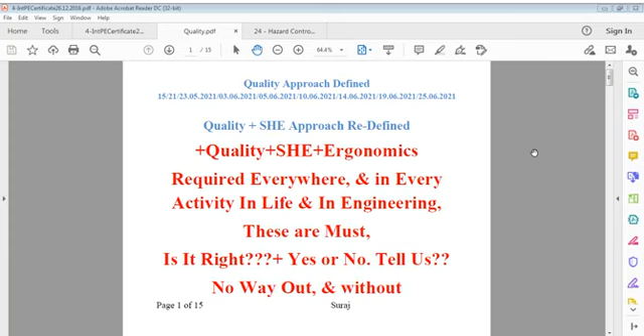I'm not going to repeat the whole file of quality here. I'm just saying quality is the leader of work. If the leader is defeated, the whole work is defeated. The whole input is defeated.

Therefore, it is a basic requirement of every professional, particularly engineering professionals, and of course particularly where quality is not dependent on mechanical performance, like civil engineering. I'm very much concerned that it's such a natural engineering, you can't imagine other worlds. Open-ended engineering, not closed-ended engineering, researchable engineering, super engineering - meaning civil engineering and construction engineering and design engineering are prime worlds of engineering.

Such engineering works digest everything, and is really...

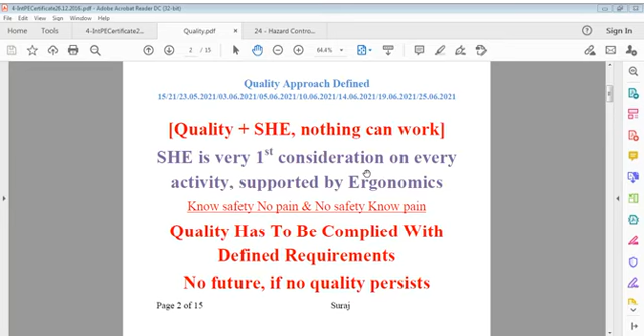And systems should be as such. Systems should be devised as such. Quality is to be achieved and must be achieved. And if you cannot achieve quality, your system shall lead you nowhere except to destruction or deterioration, and you won't be able to reinstate that.

Always quality has to be enriched, it has to be upgraded. Quality meaning is quite different here. Means whatever you have to decide and do work accordingly.

Engineering is quality education. Engineering is quality profession. If you don't deliver quality, you cannot say you engineered it. You engineered bad quality means bad engineering. Engineering good quality means good engineering.

Because engineering itself is work of mind. It's not simply physical work, it is mental work. Combination of mental work and physical work is called engineering. And if you don't apply mind, you can't get quality.

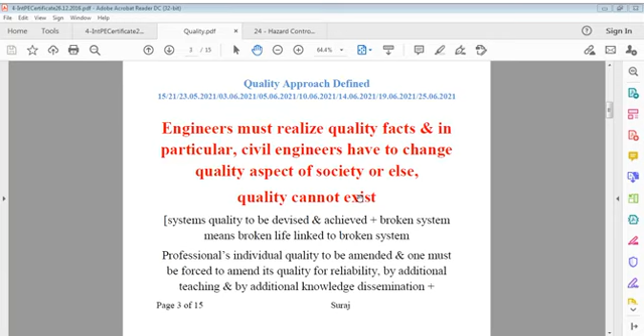Even you can say, if you don't respect nature, no problem. Respect yourself. Respect what you say, what you think, what you do for this world. That shall be enough, no need for something else. Because if you preserve your working with preserved material, you will get a lot.

If you do against nature, you do against yourself, because you too are a part of nature. You did not make yourself. You did not get birth because of your own efforts. You were brought to this world by someone else, whoever that is. That is the same power of nature.

And you are using natural materials while you work. While in work, you use natural materials, you use natural products, and you use natural human being. I am saying natural human being. Of course, human being is natural.

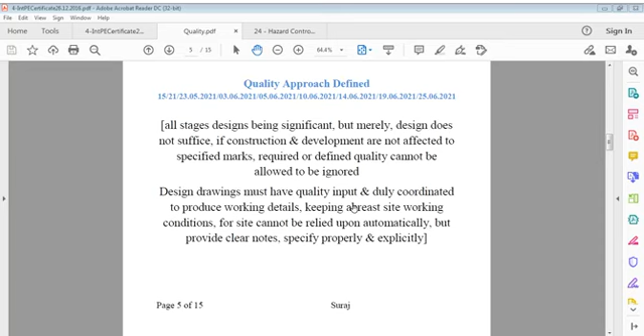We can say loss of work, or you can say destruction of material, wasting material is wasting nature, and no one has got any right to waste nature. Only nature has got that right. We don't have that right.

Therefore, we say that all activities, whatever we do, must be taken care of, but it does not happen. Somewhere it happens in some parts of the world, and in other parts it doesn't happen. But there are many reasons behind that.

Human is very weak and human is very strong. Both properties human has. Those who retain or remain in a monotonous state, there are various reasons behind that. Various reasons behind lethargy. That lethargy cannot be digested, but it happens.

Human beings are lethargic. We are human beings. We sometimes are lazy, and we sometimes are very active. It happens. Our attitude keeps changing, and we are not machines. We are natural product. We feel, we have sentiments, we have morals, we have low morals too. We depend on eating, we depend on food, and we have variations of energy, varying energy, fluctuating energies.

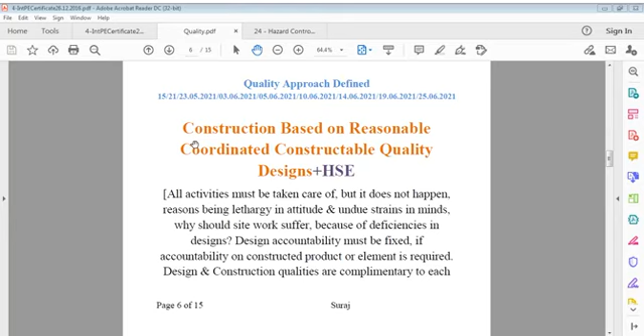So I am doing harm to my present. Certainly, when you use bad material, it will not give you enhanced life of the structure. It shall come down somewhere, it shall fail.

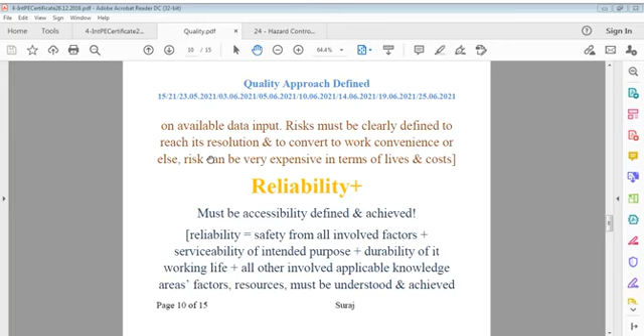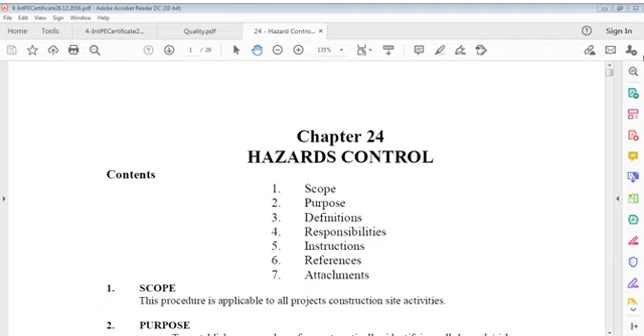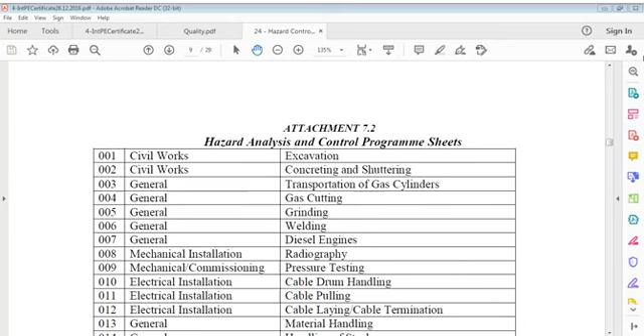So I'm not going to talk a lot today about this. I'm going to talk on safety, that's hazards control. We were discussing hazards control yesterday, and we went through many long routes on this, like STARRT card, job hazards list, and various activities and disciplines that are taken care of in this.

We talked of excavation, job hazard analysis, and hazard analysis and control programs. These are together, because if you find a hazard, you need to know how to control that hazard so it doesn't impact the work. That's the meaning of hazard analysis and control program. So we talked of civil works—we have to define what's hazard in that activity and then how to handle that hazard so it should not impact our quality system, work system, or safety system.

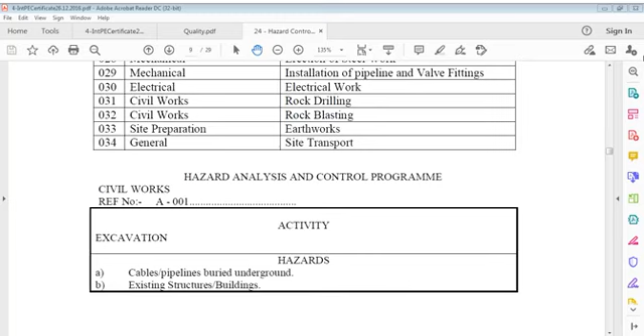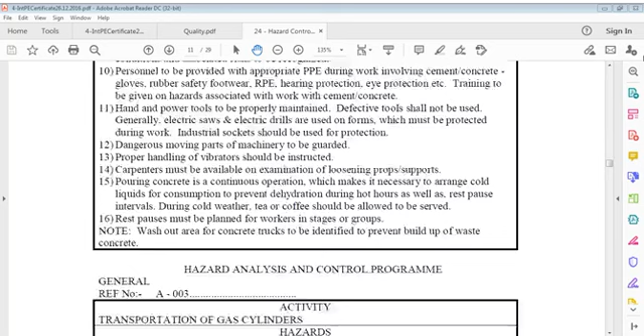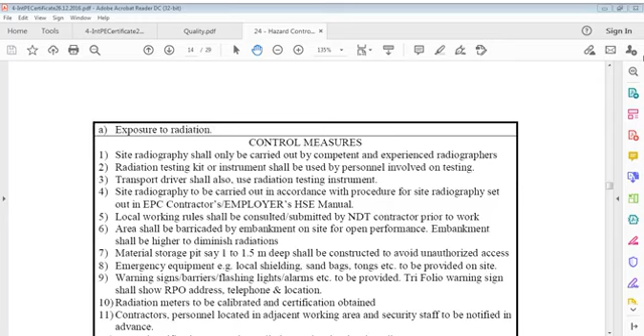Civil works, and we talked of concreting and shuttering, transporting of gas and cylinders, gas cutting, grinding, welding, diesel engines, radiography, pressure testing, cable drum handling. We studied cable pulling and cable laying, cable termination.

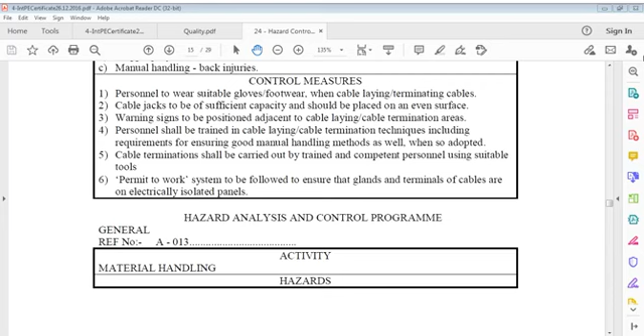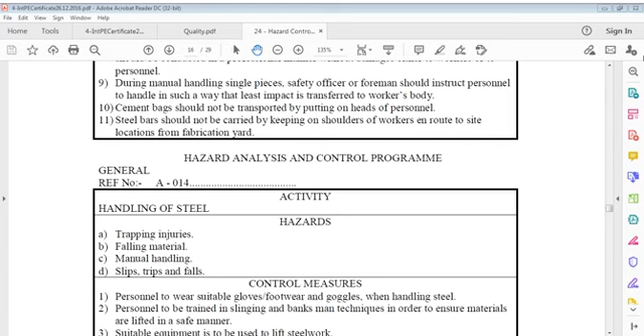Then we talk of material handling, which we were doing yesterday. We did about steel, manual handling, and we did timber. Okay, now let's first do handling of steel, because this is a very big requirement. Hazards are trapping injuries, falling material, manual handling, slips, trips, and falls.

These are, in steel work, the controls are: personnel to wear suitable gloves for steel working, footwear, and goggles when handling steel. Personnel to be trained in slinging, meaning how to raise materials by crane, and banksmen technique in order to ensure materials are lifted in a safe manner.

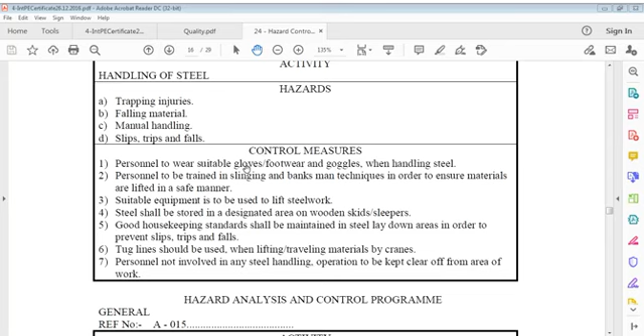Suitable equipment is to be used for lifting steel work. Steel shall be stored in a designated area on wooden skid sleepers. Good housekeeping standards must be maintained in steel laydown areas to prevent slips, trips and falls. Tug lines should be used when lifting traveling materials by crane. Personnel not involved in the steel handling operation are to be kept clear of the area of work.

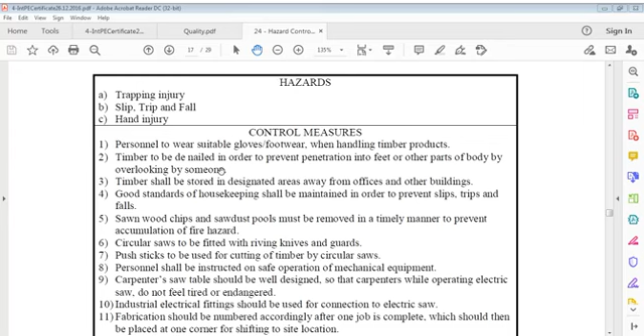Then we can say timber handling. I will not go into depth of that, just means trapping injury. It is trapping injury, slip, trip, and fall, and hand injury is very important.

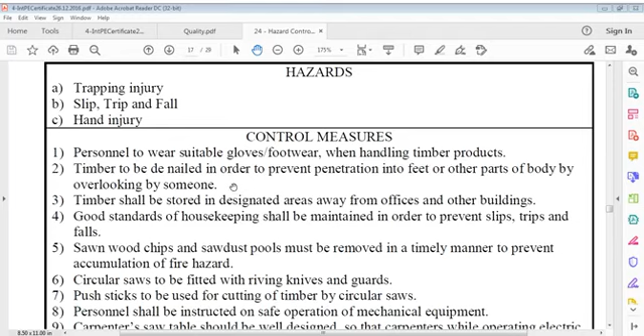So what are the control measures? Personnel who have worked there with timber, to wear suitable gloves and footwear when handling timber products. Timber to be denailed in order to prevent penetration to feet or other parts.

Denail it, remove it from parts of the body, and it should be overlooked by someone. So no nail should be allowed to stay in timber, it should be taken out, otherwise it shall cause a problem of penetration into the foot particularly.

Timber shall be stored in designated areas away from offices and other buildings. Good standards of housekeeping shall be maintained in order to prevent slips, trips, and falls. You know what trips are?

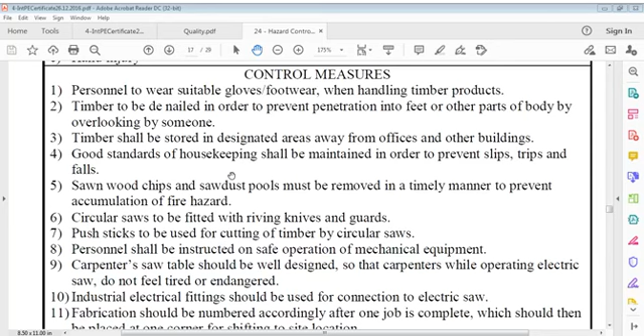Sawn wood chips and sawdust pools must be removed in a timely manner to prevent accumulation of fire hazard.

Circular saws to be fitted with riving knives and guards. Push sticks to be used for cutting of timber by circular saws.

Personnel shall be instructed on safe operation of mechanical equipment. The carpenter's saw table should be well designed so that carpenters operating the electric saw do not feel tired or endangered. Industrial electrical fittings should be used for connection to the electric saw.

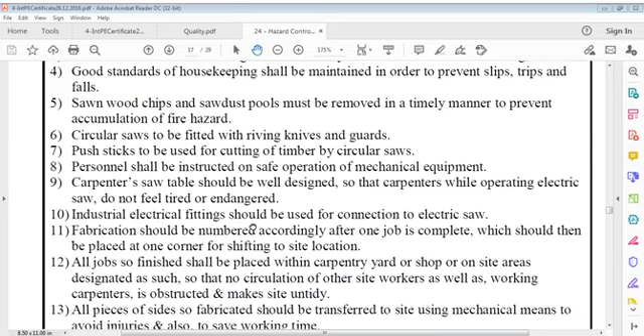Fabrication should be numbered accordingly after one job is complete, which should then be placed at one corner for shifting to the site location. All jobs so finished shall be placed within the carpentry yard or shop or on site areas.

All jobs so finished shall be placed within the carpentry yard or shop or on site areas designated as such, so that circulation of other site workers as well as working carpenters is not obstructed and the site is not made untidy.

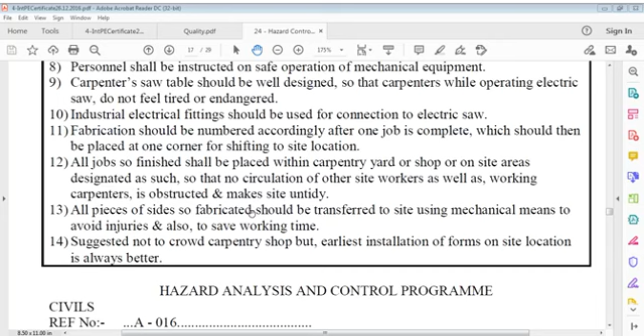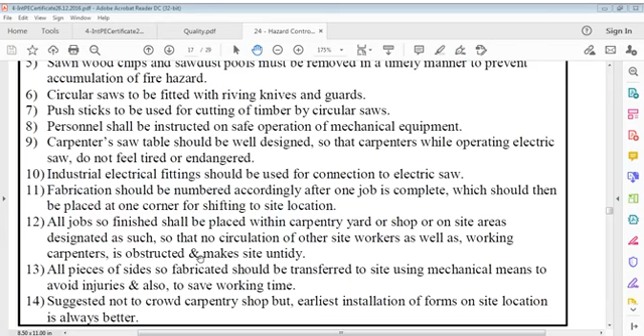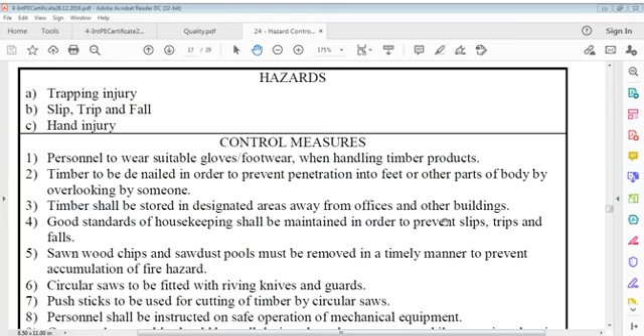It's possible if you can take this, you may say it was timber work. This was the hazards for handling of timber.

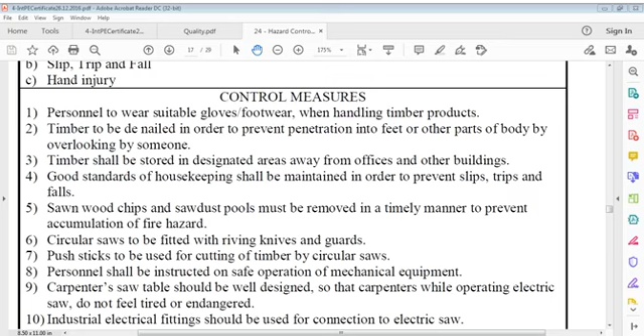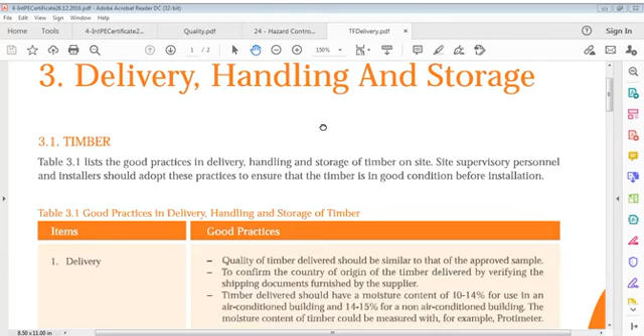We go and take this. That's a page. This is delivery, handling and storage of timber. Let's go through this and see how it works.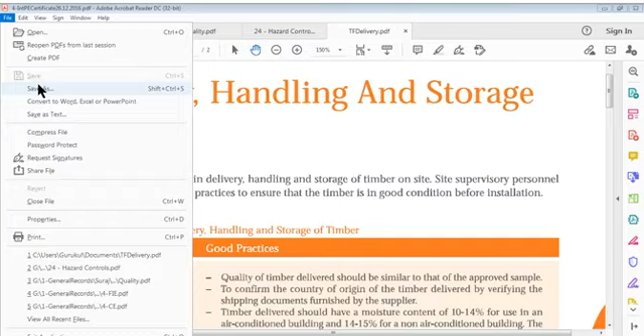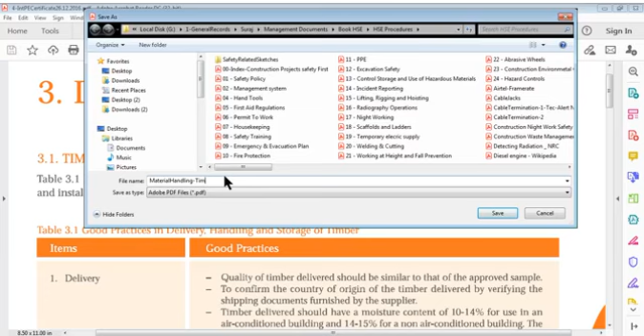I'll say metal, let's say metal. Timber, this timber, you can say timber. Then it is safe handling of timber.

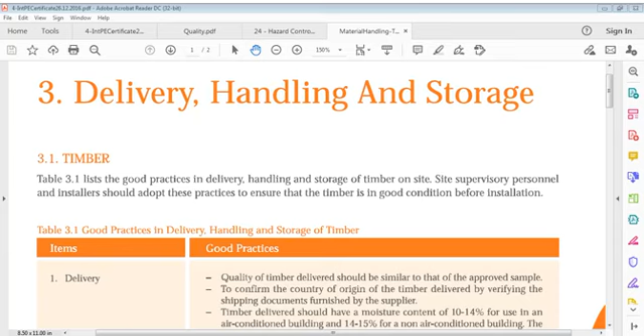Let's do this code of practice for safe handling of timber preservation. Let's put this also in our record so that we can talk of this. It's very important, though timber is not in plant use, but whatever it is, let's take care of this.

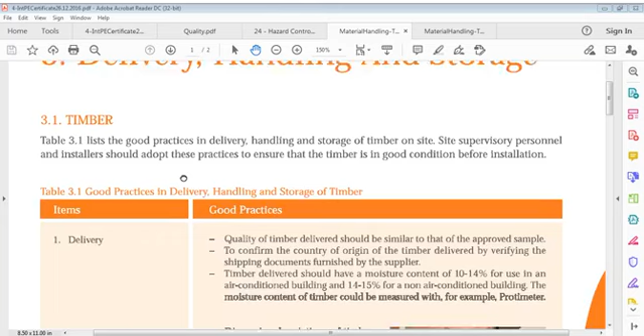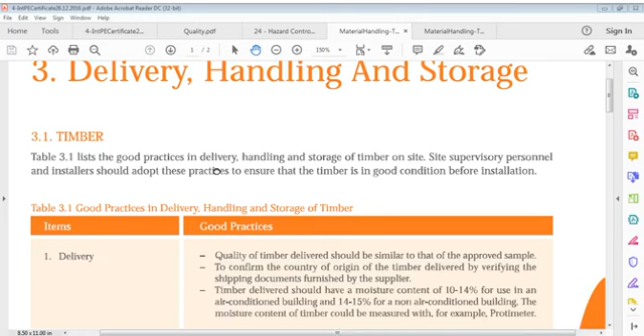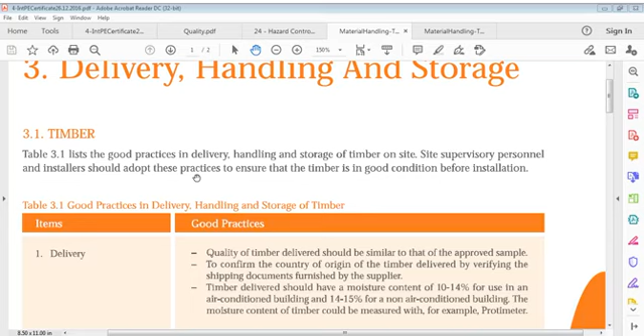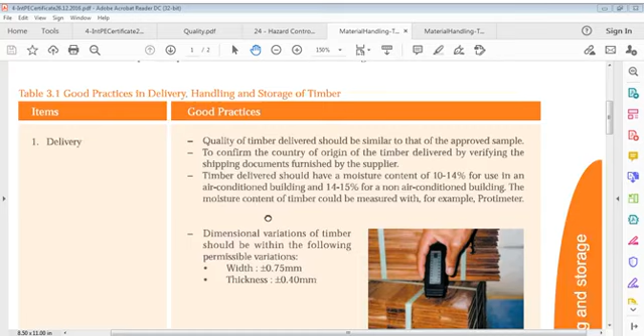Good practices in delivery, handling and storage of timber on site. Site supervisory personnel and installers should adopt these practices to ensure that timber is in good condition before installation. Now this is the table here. It says good practices in delivery, handling and storage of timber: one is delivery, other is handling, then storage.

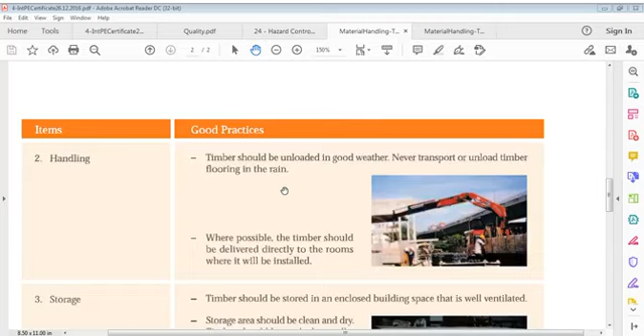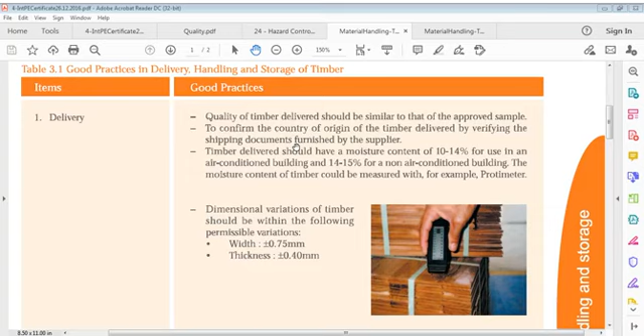So, adhesive and finishing coats. Then let's do timber in delivery. It says quality of timber delivered should be similar to that of the approved sample. Confirm the country of origin of timber delivered by verifying shipping documents furnished by the supplier.